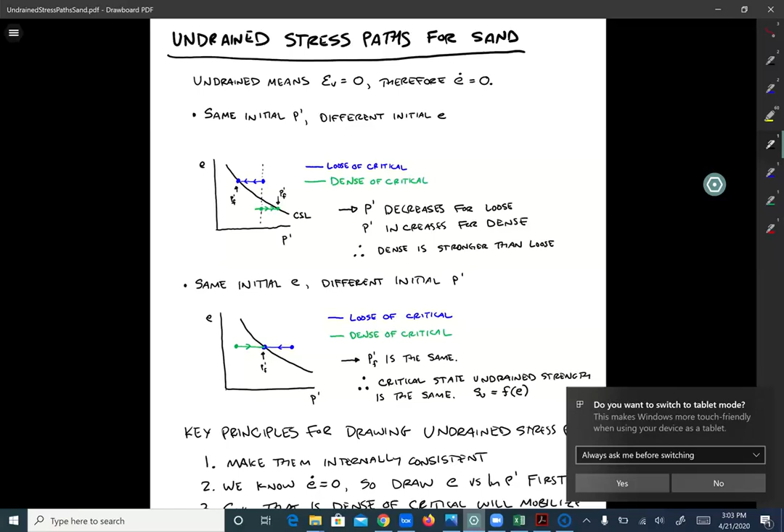In this video, we're going to be talking about undrained stress paths for sand. So we usually start with drained stress paths. It's a little more intuitive to think in terms of a drained stress path because we know the stress condition we're imposing on the soil.

But a lot of the time, we have to worry about undrained stress paths. And a lot of the time we think of sand as being drained and clay as being undrained, and that's not really true. It's not an equivalence there. Sand can be drained or undrained, right? If we load it really fast relative to the rate at which water can dissipate, it can be undrained. Clay can be drained. It may take a long time for the water to drain, but eventually it may change volume.

So it is important to know how to do both drained and undrained stress paths for both kinds of soil. So what undrained means is that the volumetric strain is zero during loading, right? It's not allowed to change volume. We can impose that in a laboratory test really easily, either by closing a drain tap on a triaxial compression test or by doing a constant height simple shear test. So in a laboratory setting, it's actually pretty easy to get undrained behavior. It can happen in the field, for example, during earthquakes. An earthquake happens quickly, sand doesn't have time to drain during an earthquake, and so it may behave in a way that's undrained during earthquake loading.

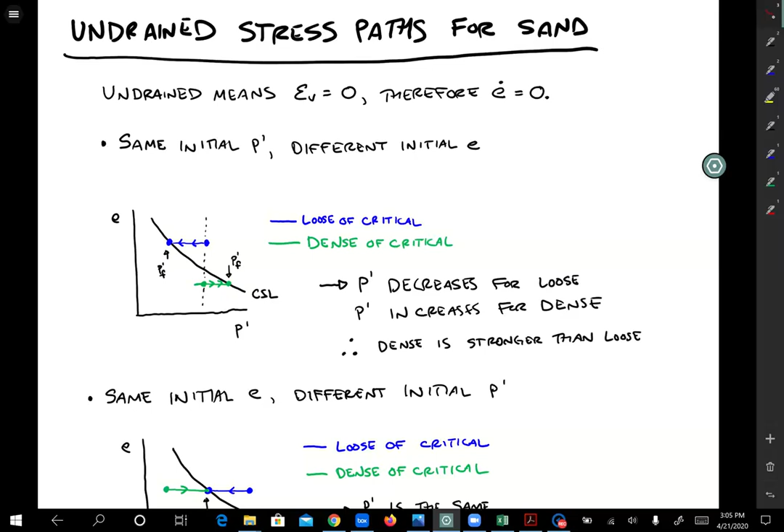So let's look at what happens if we have two soils with the same initial effective stress but different initial void ratios. One thing you should notice: there are multiple ways that you can get to be loose of the critical state line. There's the critical state line - we talk about it as being loose or dense of critical. You could go above the line by becoming loose, or below it by becoming dense, at a constant P prime value. What we'll look at later is that you could technically be at the same void ratio and be dense if you're at a low effective stress, but then increase the effective stress and become loose of critical. So even though we call it loose or dense of critical state, it's not solely a function of density - it's a function of the combination of density and effective stress.

So anyway, here we have the same P prime and the void ratios are different. This one is loose of critical state, and we're starting at this point and moving until we reach the critical state line. So what we find is that P prime will decrease for the loose of critical soil, whereas the dense of critical starts here - initially it's a little bit contractive and then it goes over to the critical state line. So P prime at failure is higher for dense sand than for loose sand. Therefore the dense sand is stronger than loose.

One thing I'll point out here: I said that initially P prime will decrease and then it will increase for dense sand. That's related to the dilation behavior for drained loading of dense sand. We talked about how dense sand initially is a little bit contractive and then it becomes dilated. So let me just make a little sketch right here.

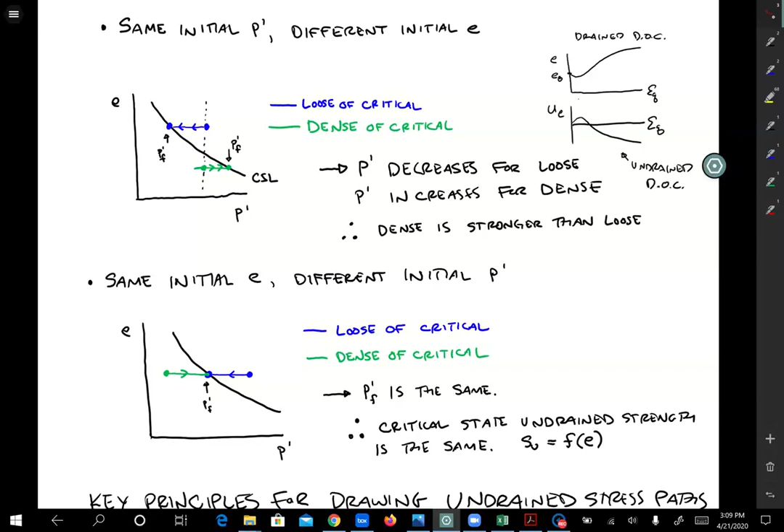Let's go down here now. This is the other scenario I was talking about, where we have the same initial void ratio but different P primes. Here's the consolidation stress for the one that's dense of critical, a fairly low consolidation stress, and here's the consolidation stress for the one that's loose of critical.

An easy way to think about this: if you put your knuckles together and push really hard, you could force them past each other without separating too much - in the extreme case you might even break your knuckles, so definitely don't do that. If you barely push them together, your hands can separate a lot more easily. So the sand will be more dilative when it's dense of critical, when it's consolidated at a low effective stress.

P prime at failure is the same. Notice that the one that's dense of critical initially builds up positive excess pore pressure and then reaches the critical state line, while the one that's loose of critical just goes straight to the critical state line. Let me label the CSL here.

So what we find is that P prime at failure is the same, and that means the final strength is actually the same for these two soils. We'll see later that in Q-P prime space, if you're on the critical state line and P prime is a constant number, then Q is the same number, and the strength is going to be the same in both of these cases.

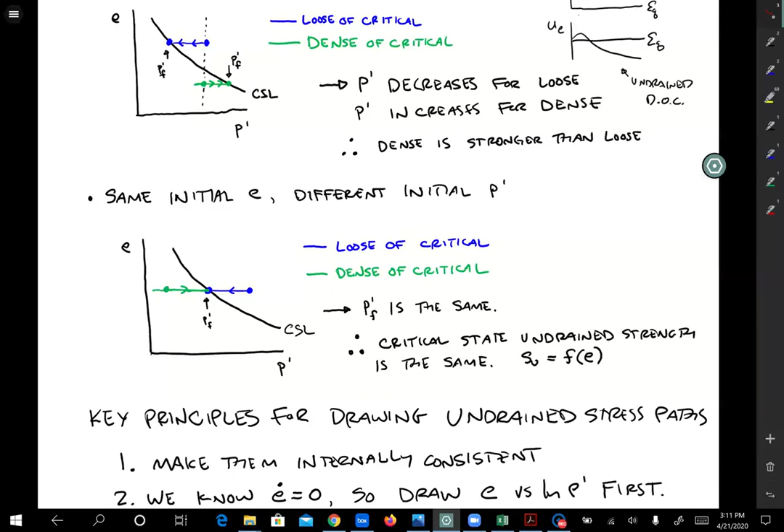Let's talk about some principles for drawing undrained stress paths. There are a few things you have to remember when you draw these, but there aren't that many principles. If you just memorize these, you'll be able to draw any stress path you want.

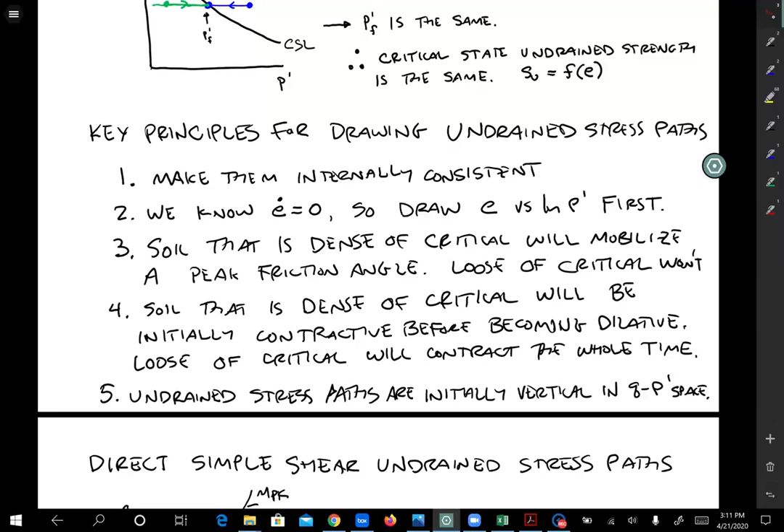First, make them internally consistent. You have Q versus P prime in the upper left, and Q versus epsilon Q in the upper right - the Q's have to line up, since it's the same Q you're plotting, so those have to be internally consistent. Same thing for the E axes and the P prime axes.

The second thing: we know that the change in void ratio is zero, so void ratio stays the same. Therefore, you should draw the E versus P prime, or E versus natural log of P prime, stress path first. Sometimes we put the x-axis as natural log P prime, sometimes just P prime - in any case, draw the E-P prime one first because we know what's happening there. That's different from before, where we drew Q versus P prime first for a drained stress path. Now that it's undrained, we'll do E versus P prime first.

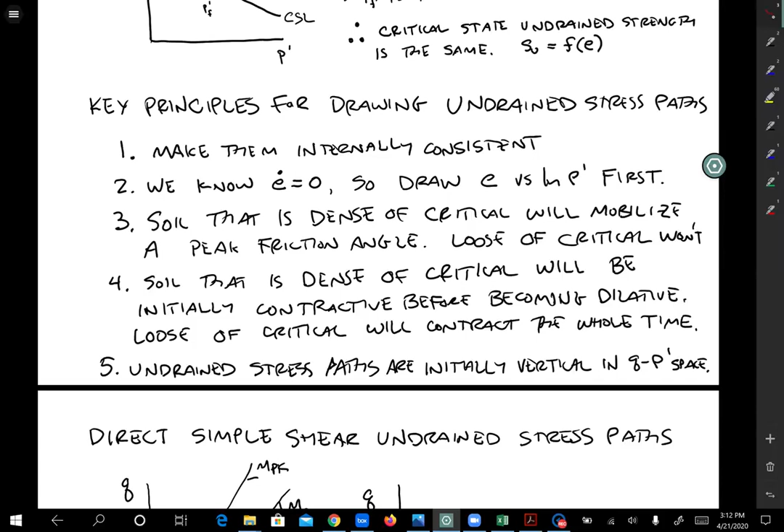Here's one you just have to memorize: soil that is dense of critical will mobilize a peak friction angle, while soil that is loose of critical won't. I'll show you what I mean by that in just a second. Also, soil that is dense of critical will be initially contractive before becoming dilative - that's that little part of the curve right there. Don't forget that part: it contracts a little bit, then it dilates.

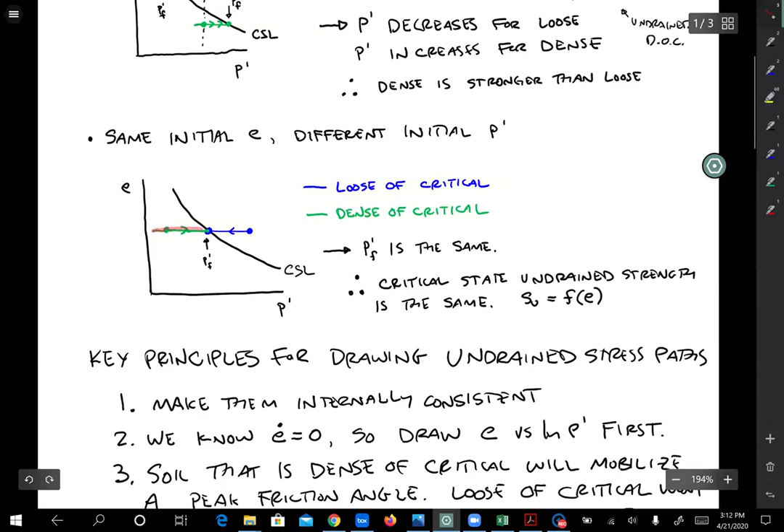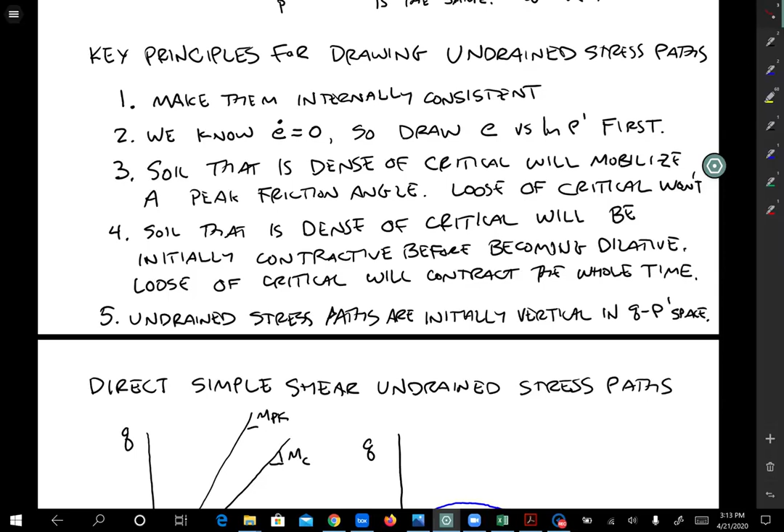Undrained stress paths are initially vertical in QP prime space. So even if you have a triaxial compression stress path that has a 3-to-1 slope for drained loading, the undrained stress path is going to be vertical initially.

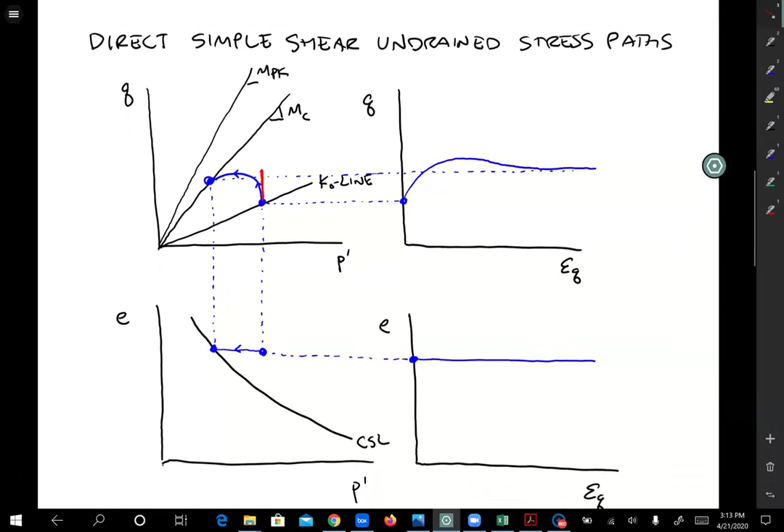Let's take a look at what's happening in direct simple shear undrained stress path. I'm going to label these here. The blue line is loose of critical. Then I'll have you draw the dense of critical one too, and then I'll draw it in so you can see what it looks like, but you should take a stab at it first.

We're starting here, that's our initial void ratio and initial P prime. We know the stress path is horizontal and it's going to move straight to the critical state line, right from right to left, and it ends up right there on the critical state line. So we've drawn one of them, that one's pretty easy. Now what we need to do is figure out what the QP prime stress path looks like.

So we draw these little dashed lines up here. There's our initial point. I'm assuming this is like a simple shear test, starting on a K0 consolidation condition, so the initial vertical effective stress is bigger than the initial horizontal effective stress. Then here's the line up here, that's where we end up. So we have the beginning point and the ending point.

We also know that the stress path in QP prime space has to start out vertical. Those are the only constraints we have: an initial point, a final point, and we have to get from one to the other. The way I've drawn it is one possible path that satisfies those conditions, but there are other possible paths. It could start here and not really mobilize a peak, or it could make a bigger peak and then come down. All of those would be okay—different soils exhibit those different paths, just depends on the characteristics.

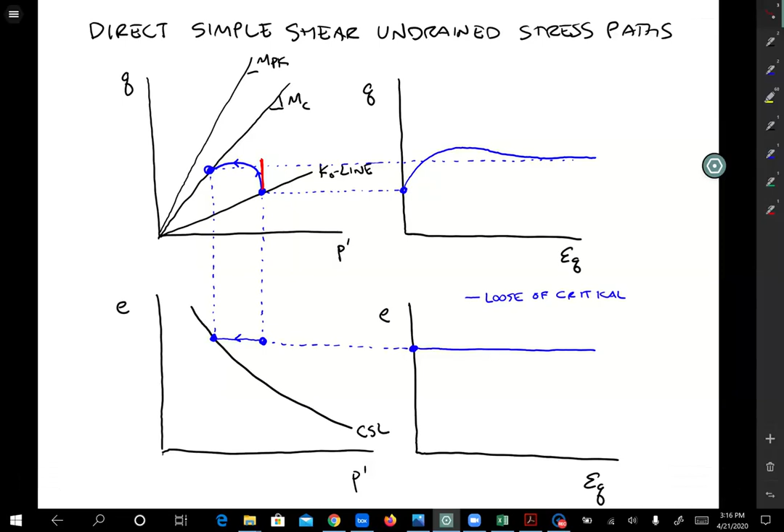Now we have this other easy one, void ratio versus epsilon Q, and of course void ratio is constant, so it's just a horizontal line. This void ratio versus epsilon Q isn't really very meaningful—sometimes we might look at it just to make sure it was undrained. If we measure some volume change and the void ratio changes, then we didn't really achieve our objective of having an undrained test. But this is actually not interesting to look at, E versus epsilon Q.

So what we do instead is plot excess pore pressure versus epsilon Q, which is what I've drawn down here on these axes. Here's zero excess pore pressure, and this soil is contractive the whole time. You can see here, it starts out vertical and then P prime is decreasing as we go.

The way we'll figure out how much excess pore pressure there is, is to look at what the stress path would be if there was no excess pore pressure. No excess pore pressure means drained—if we're doing a drained test, there's no excess pore pressure, so we know what that stress path is. That's the red line right here, so that red line would be a drained direct simple shear stress path.

We can then compute what the excess pore pressure is because it's just the difference. Here's the drained stress path, no excess pore pressure. Here's the actual stress path that we've measured that has some excess pore pressure, and the difference between them is UE. So the excess pore pressure is just P prime drained minus P prime undrained, where P prime drained is kind of a fictitious quantity.

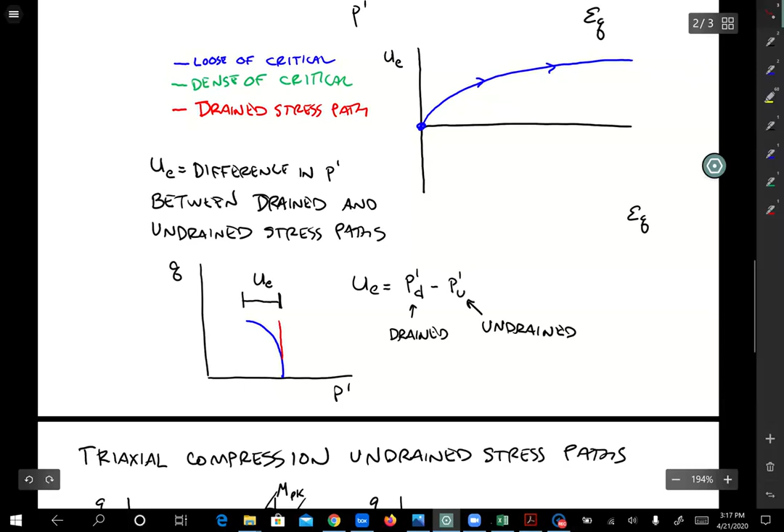We didn't actually do a drained test. We just know that would be the stress path if we did it drained, so we can calculate excess pore pressure. In this case, it just goes up, reaches a plateau, and we're good.

What we're going to do next is sketch an undrained stress path for the sand that's dense of critical state. Let's have it start at the same void ratio, but a lower p prime value. I've drawn the initial point, and your job now is to pause the video, get a piece of paper or your tablet, and sketch what that dense of critical undrained stress path will look like. Then come back and we'll go through it together.

Welcome back. Let me draw this undrained dense of critical stress path. Initially it's contractive, so we're going to come down, p prime decreases, and then it goes back to the right and dilates, reaching critical state at the same point as the loose of critical one, because we started at the same void ratio.

Now, I'm plotting the x-axis here as p prime instead of ln of p prime. I'll talk about this in another lecture on differences between sand and clay. Basically, the critical state line is curved this way when it's p prime—it curves down like that. If this was the natural log of p prime and we were looking at sand, the critical state line would curve the other way. We don't have to get into it here, just a preview of what's coming later.

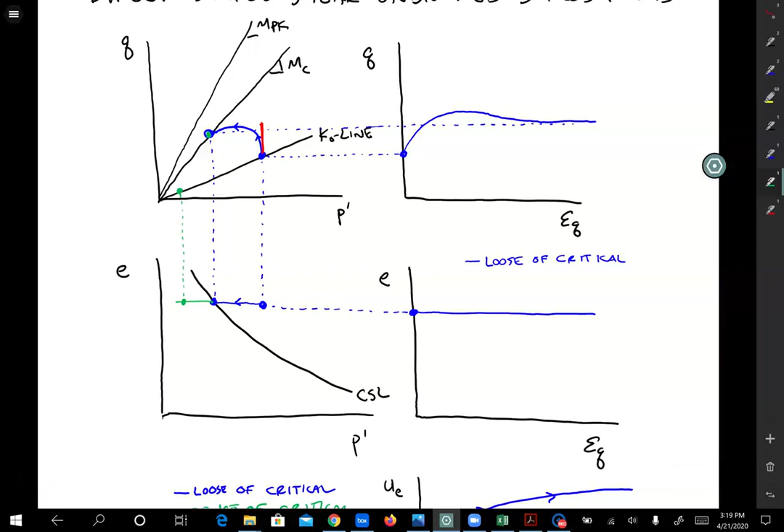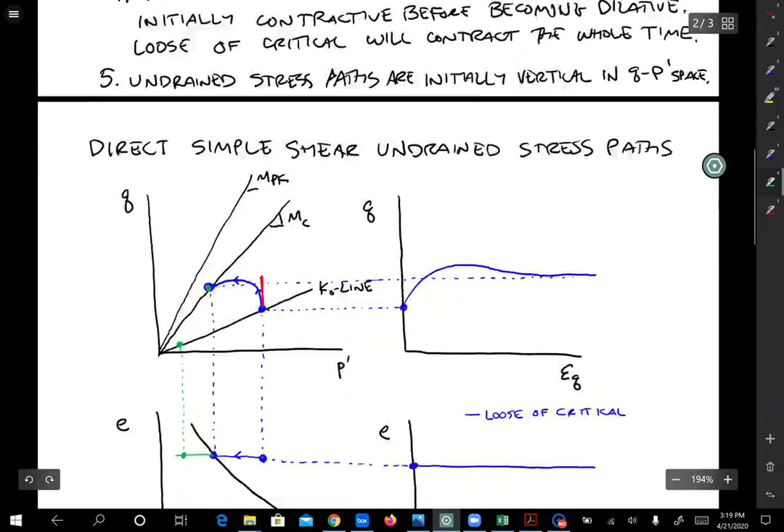Now we know we're going to start at this point and end at this point on the critical state line. We mentioned before that soil which is dense of critical will mobilize a peak friction angle—that's number 3 we had to memorize. What I've done is drawn in the line representing the peak friction angles right there. We don't know exactly how much it's going to mobilize, this is basically a guess, but we know the peak friction angle is bigger than the critical state one, so I've drawn it in.

What we can do now is draw an initially vertical stress path, and it has to come down to this point. It's going to be initially contractive, so it goes over here, then reaches this peak friction angle line and comes down from there.

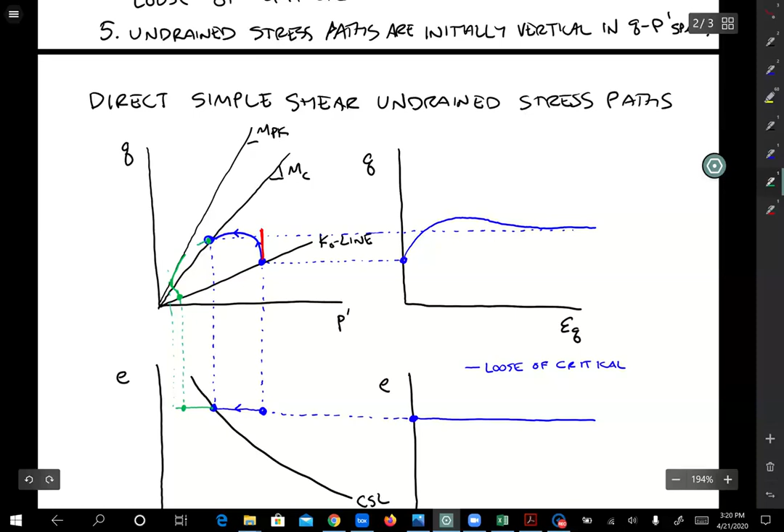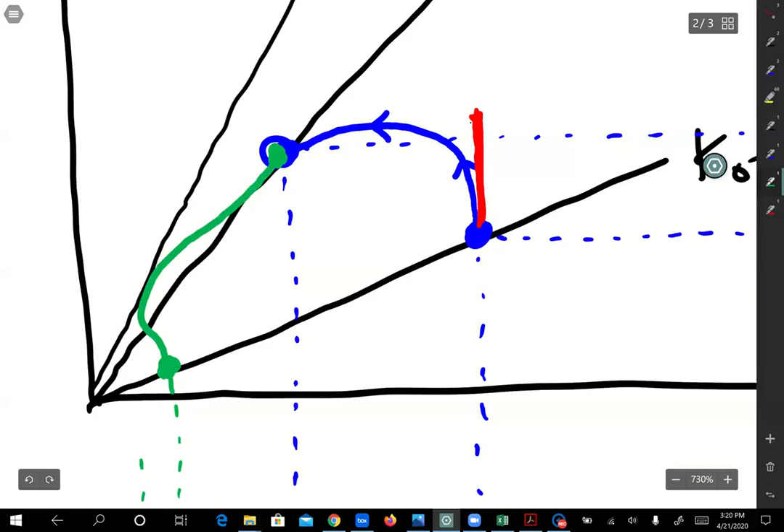Let me zoom in, I'm going to undo a few of those lines—it's really messy. Okay, so we're starting vertical here, we're going to go up that way and then reach failure right there.

It may be a little confusing to think about mobilizing a peak friction angle in this case, because we did not mobilize a peak in the stress strain curve. Let's come over here—we're starting at a lower q just because we're at a lower initial p prime, and our stress strain curve ends up here at the same point as the other one. It seems strange that this one mobilized a peak friction angle because it doesn't have a peak in the stress strain behavior. For drained loading, we did have a peak in the stress strain behavior, and that's when we mobilized the peak friction angle.

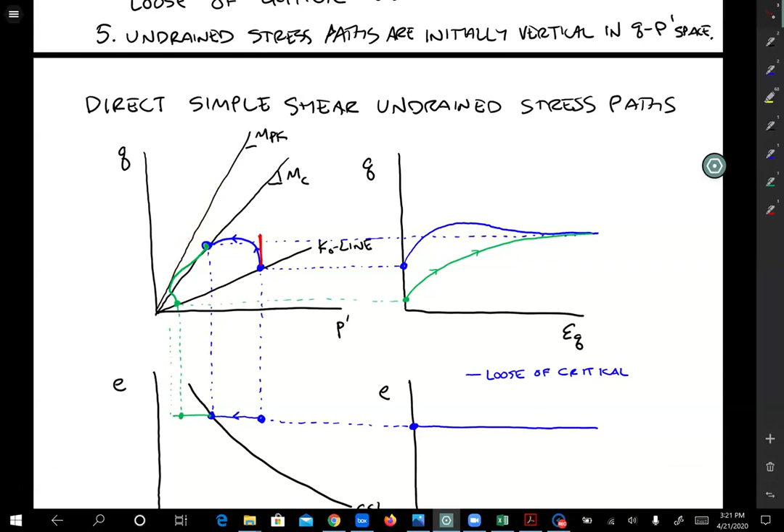Here we mobilize the peak friction angle just when the line crosses over the critical state line. You can see now we're tangent, at this point, to the peak friction angle line. So that's where we mobilize the peak friction angle—it's at a lower stress ratio. Anyway, that's our stress path.

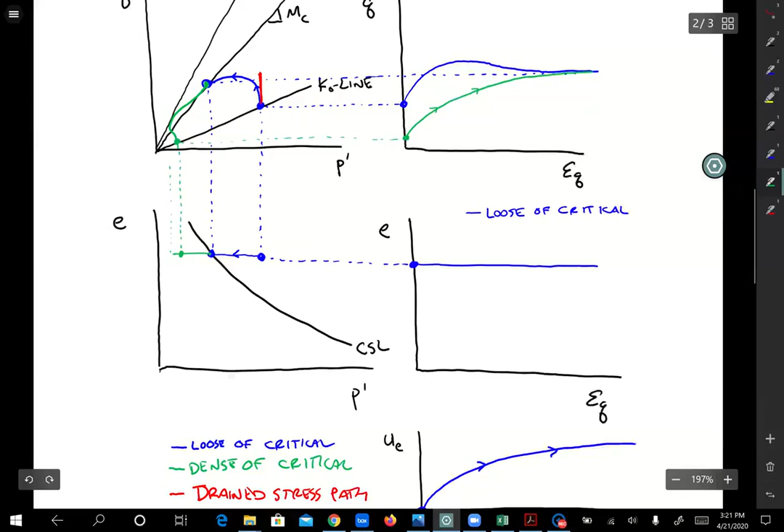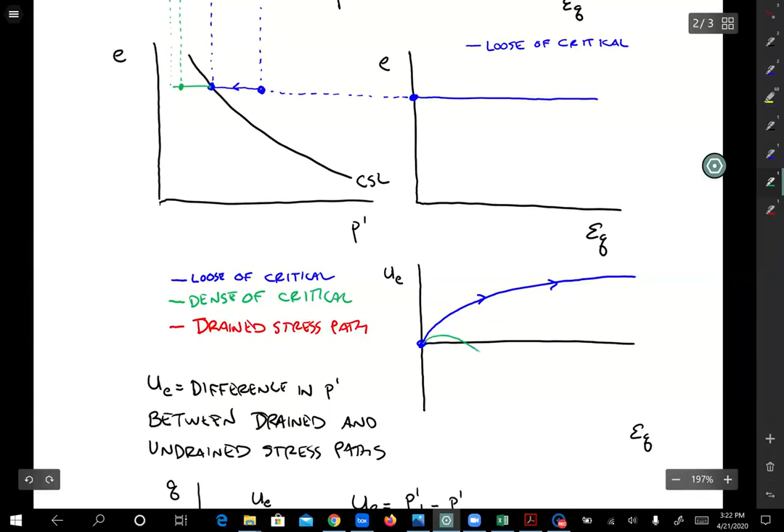Then, of course, e versus epsilon q looks the same because we're keeping the same void ratio the whole time. And if we plotted the excess pore pressure versus epsilon q, initially it's contractive, then becomes dilative and goes down like that. So there's our final line, and we've got our full stress paths for this one.

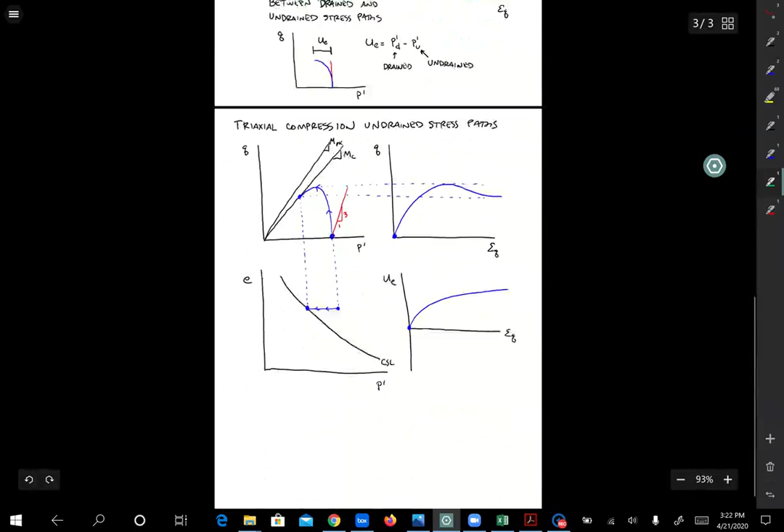Okay, let's do the same thing for triaxial compression. The only difference now is that the red line is the drained stress path for the triaxial compression stress test, and it's at a 3-to-1 angle instead of vertical. For direct simple shear, it's vertical.

So anyway, we're still going to start loose of critical. We go straight this way, ending at the very end. The process is actually kind of the same as for a direct simple shear stress path. Then we start here—this one's isotropically consolidated, so that's another difference between triaxial compression and simple shear. A lot of the time we start at Q equals 0 for triaxial compression, going initially vertical, then reaching a peak and curling back down and around to the critical state line. And here's our stress-strain curve.

I didn't even take the time to draw void ratio versus epsilon Q because it's not interesting. So let's just draw excess pore pressure versus epsilon Q—excess pore pressure does vary, so that one is more interesting.

Once again, let's start here with the point at the same void ratio, but at a different P prime to make it dense of critical. Actually, let's vary it up a little here—let's start it at a lower void ratio, right there, just so that it's not exactly the same as the previous one. We're adding a little bit of a challenge here to draw this stress path differently.

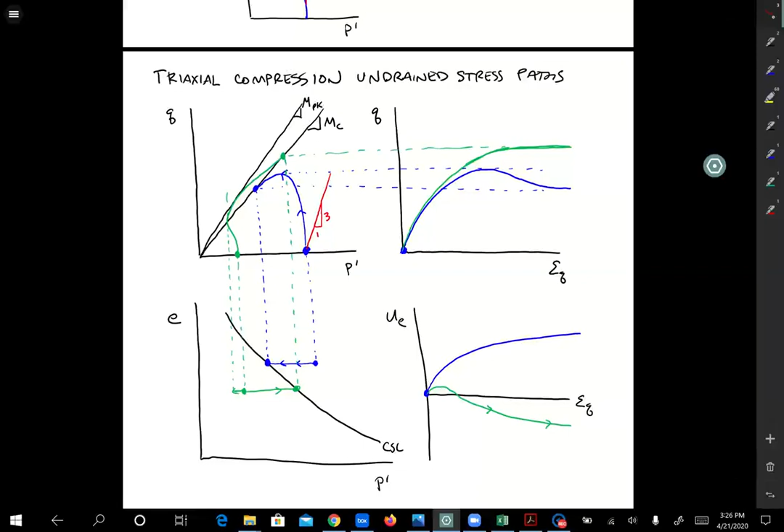Then for excess pore pressure, we're going to start up here, come down, and become dilative, right? So it basically looks very similar to the direct simple shear stress path. The only thing is that if we're computing pore pressure now, it's going to be the difference between this point and that point—instead of a vertical line, it's going to be that distance. So if we did the test without any excess pore pressure, it would be the red line, but we have to compare with that to get the excess pore pressure. And that's it for undrained stress paths for sand.